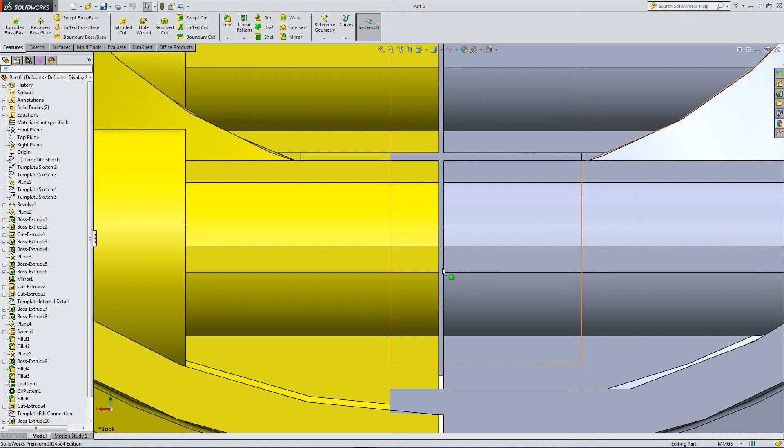Okay, so in this part we're going to start adding some finer detail. We've got the two parts offset, but there's a gap where they don't really meet, and we need to fill it. So I'm going to take the screw mounts and bring them together.

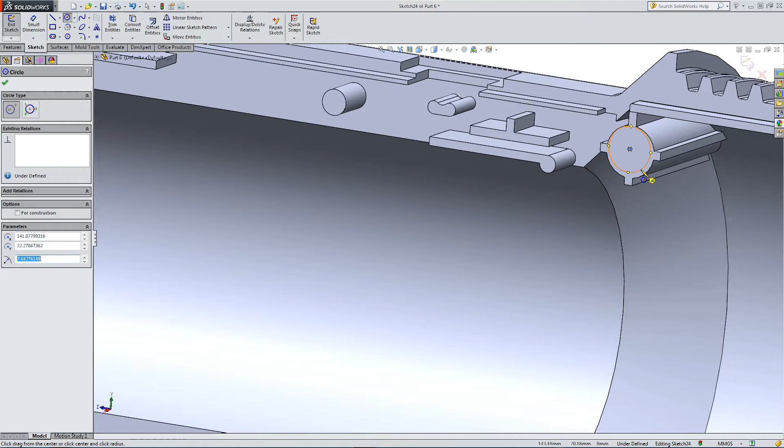So I'm sketching on the right plane, or I'm not - I'm sketching directly on the faces because we're actually offset from the right plane as of when we divided the parts.

So let's put some geometry, in this case circles, over the bits we want to bring out. So we're going to extrude these bits.

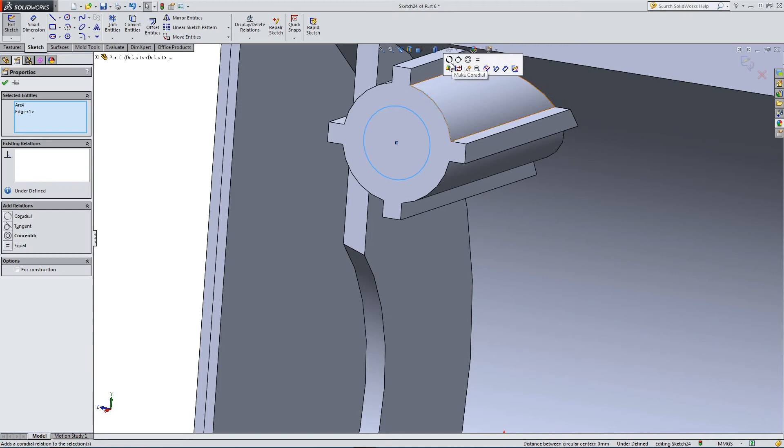We need to make co-radial because we want to fully constrain the circle to some geometry. So to do this, we're just selecting the circle, selecting the edge, making co-radial.

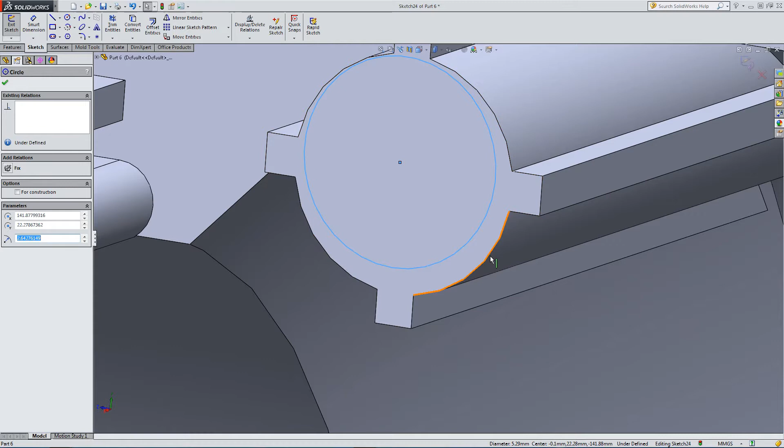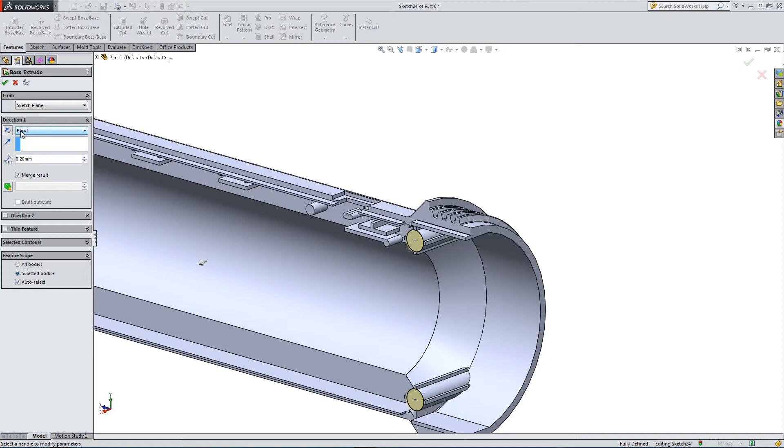So we're in a good position to bring the parts together. I know the width of the rectangle we made to produce the gap was 0.2, so we can make this 0.2. So we're extruding out by 0.2. Feature scope is this part.

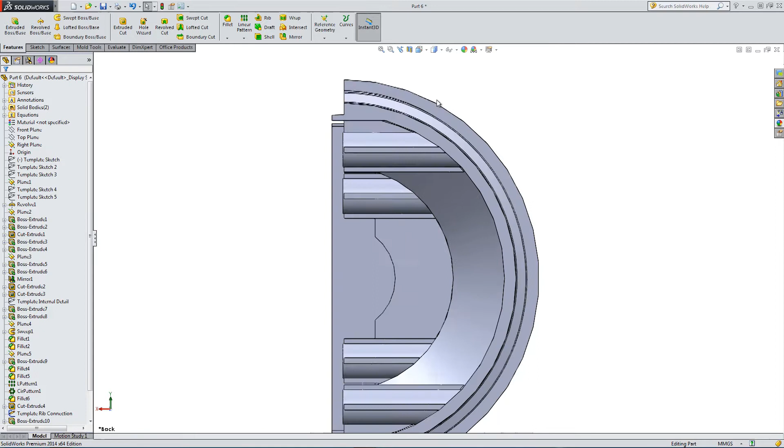That should at least give us 4 fixing points where the two halves clearly meet. Oh, there you go - you can see the gap that we had has gone. So it's just a slightly more realistic part than it was before. Can't really have the parts floating offset from each other.

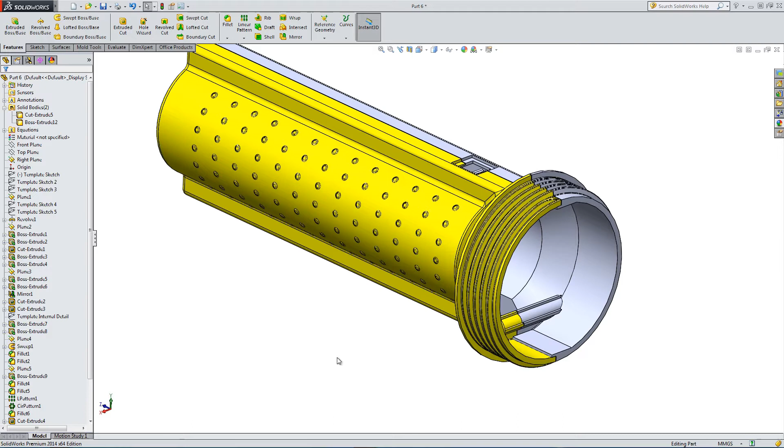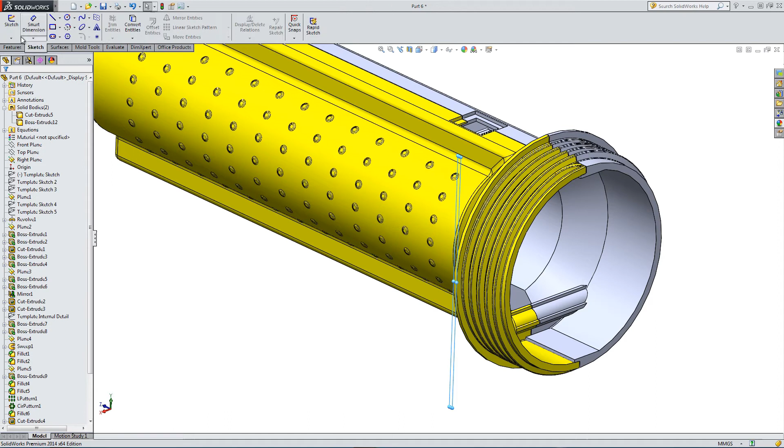So I'm offsetting now from the right plane, but in parallel with the right plane, on the edge of the circle, right on the tip of the lens.

So here we go, I need to draw some circles. I'm offsetting away from the part for a reason, because I'm going to cut some material away from the outside.

So what I'm about to do with these circles, let's link them to the screw mount. So I'm selecting the axis for the screw mounts.

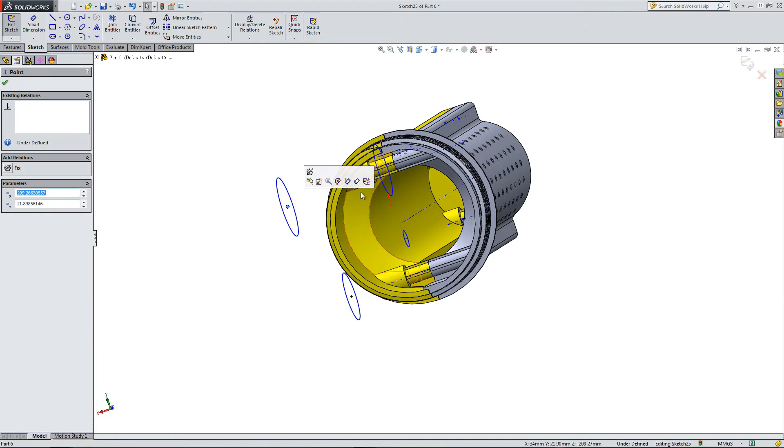Just need to fully constrain all of them. So at the very least, we now have the centers constrained, and we now need to standardize the diameters. So let's make them equal. Let's give them a dimension.

So we're going to make them all 6 mil. So we made all the circles equal, and we made them all 6 mil.

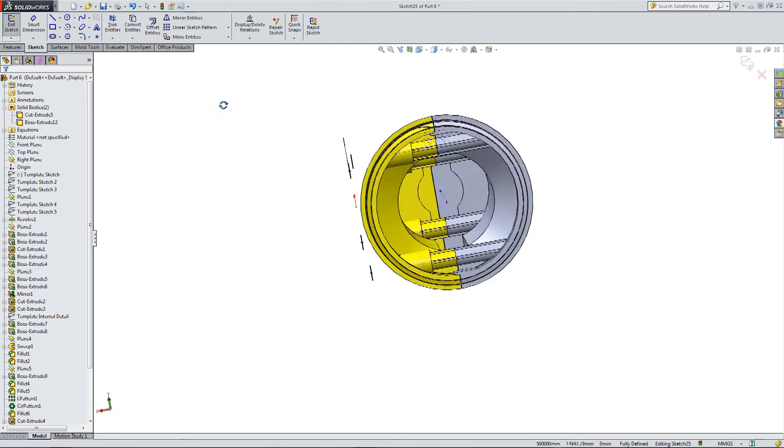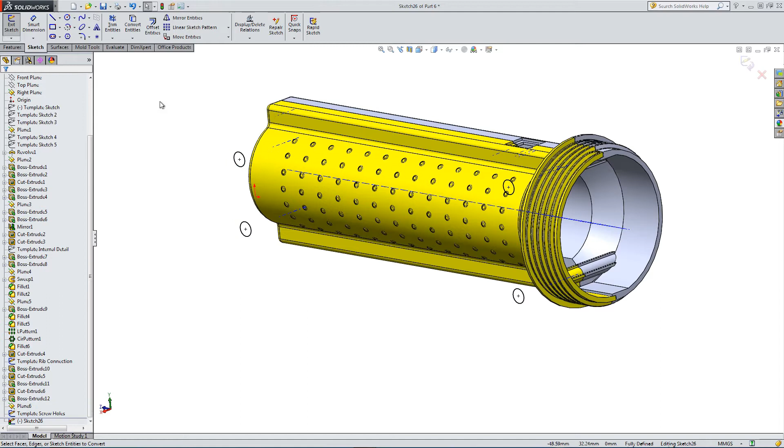So we need to cut these circles. Just have a think about how best to do this. So let's take them one by one. First we take the ones at the front.

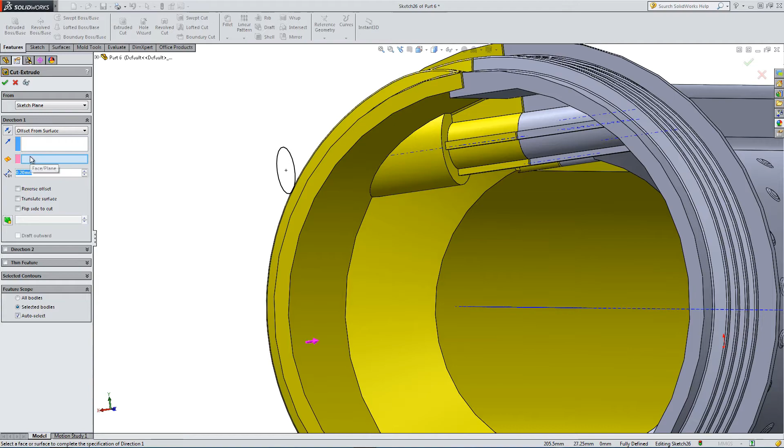So we've selected the same plane, we've copied the geometry from the front, and now we're doing an offset cut extrude, offsetting from surface. We're offset by 2 mil because we need a mounting point. We're just going to hollow out some material for the screw thread. And there you go - we've hollowed out some material and left 2 mil for the connection between the bodies.

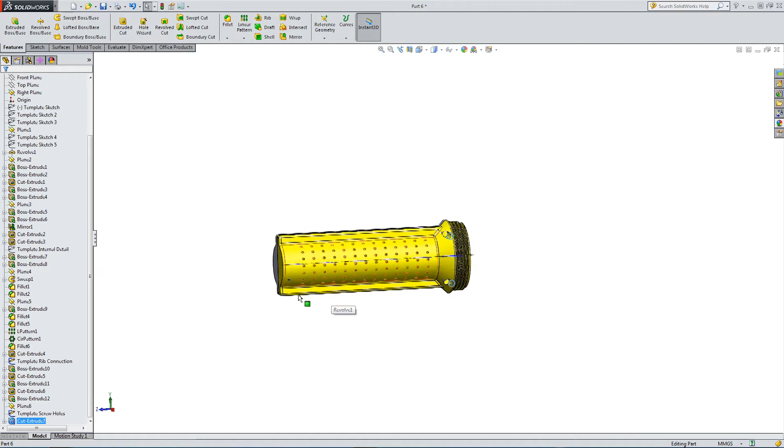Now let's do the back. We can use the template sketch we made, the template screw hole sketch. Sketch on the same plane, up to surface, or offset from surface - we need to pick a surface to offset from.

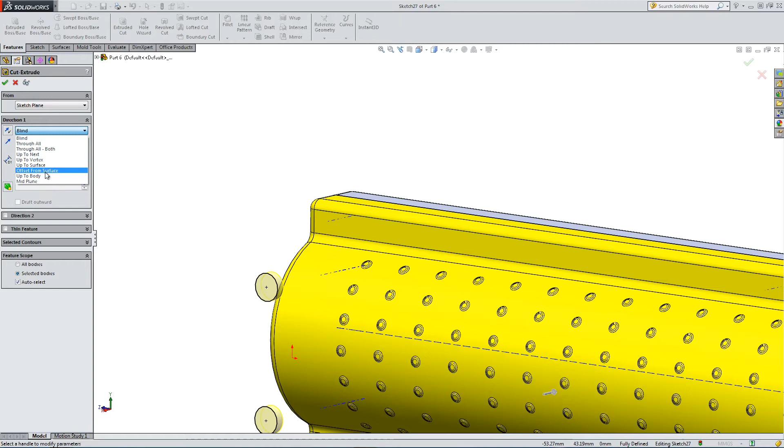We haven't got a lot to play with, so it has to be this back face, yeah? So let's see if there's any depth achieved.

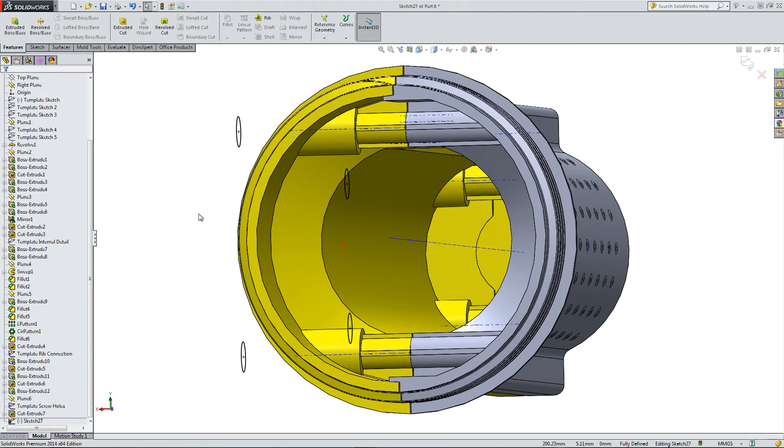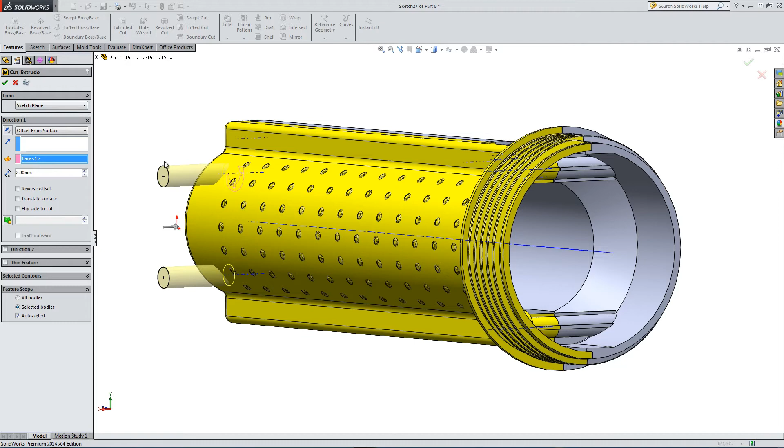Let's try this again. Offset from surface, 2 mil - what do we get? Not a great deal of depth. We may struggle with the screw head sticking out, so might have to look at that.

So now we need some bolt holes. We've selected the hole specification tool. M3 screw clearances, ISO standard type screw clearances. Hole size is an M3.

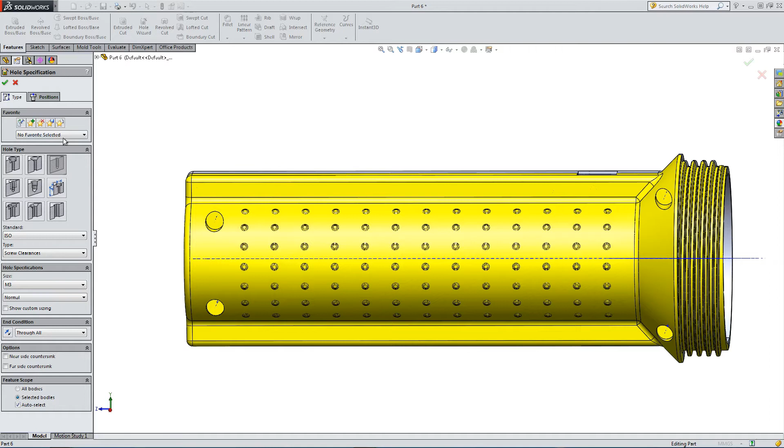We need to find a position, so go into the position tab. Let's place - so there's one. If you place it and manage to get it to relate to the part, that's half the job - you don't have to go back in and realign.

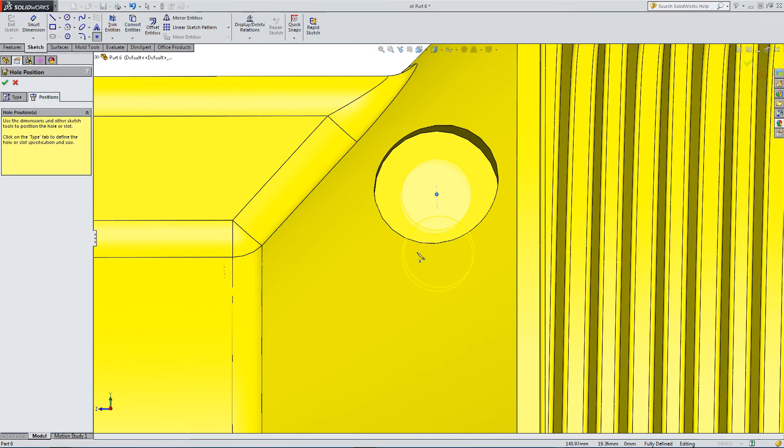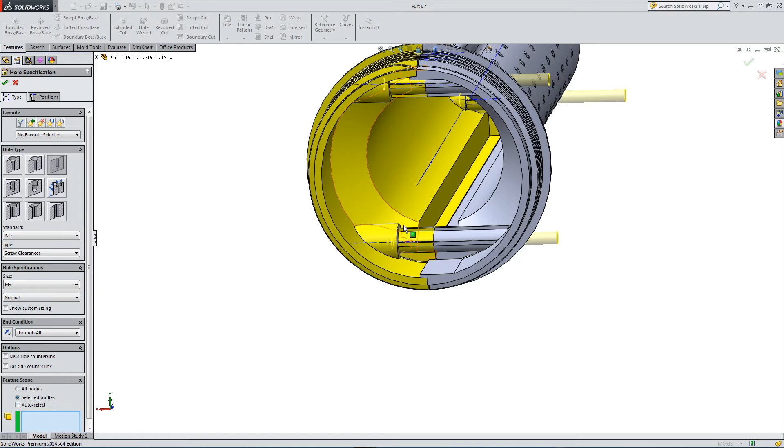Maybe 80, 90% of the way through. So performing the cut, we went through just the yellow body. We've got a threaded mount.

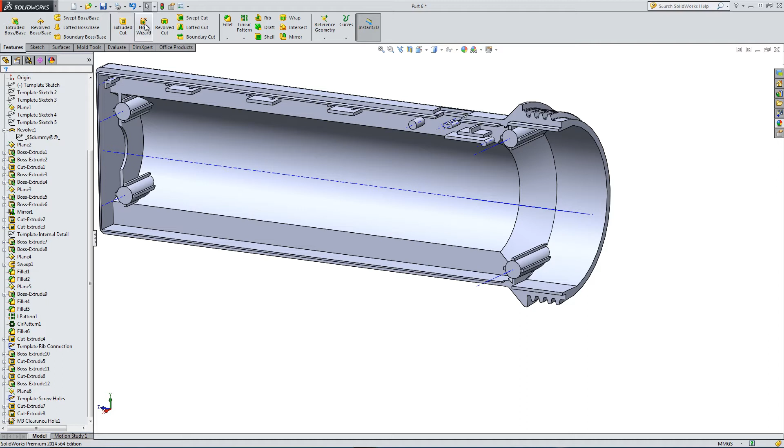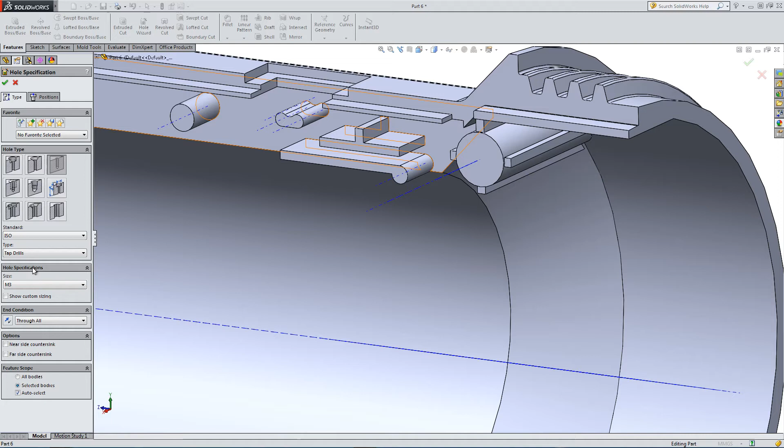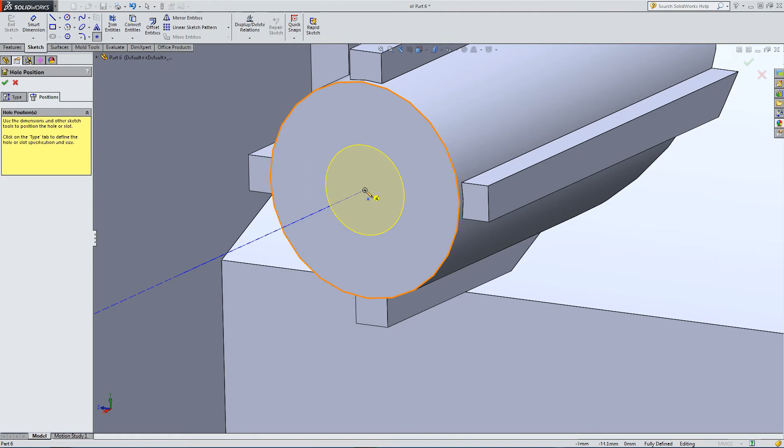So we need to do the same thing to our grey body part. I suppose we could have tried to go through the through hole, but we need a tap drill this time. Going by the ISO standards, but using tap drill - tap drill basically means we're going to leave enough material in this part for somebody to manually use a tap, like a little cutting tool for cutting threads, to cut the threads out. Of course, if you were going to mold this part, you would probably want to build the threads into the part.

So there's no human element getting involved, but so we've got 3 out of 4 parts.

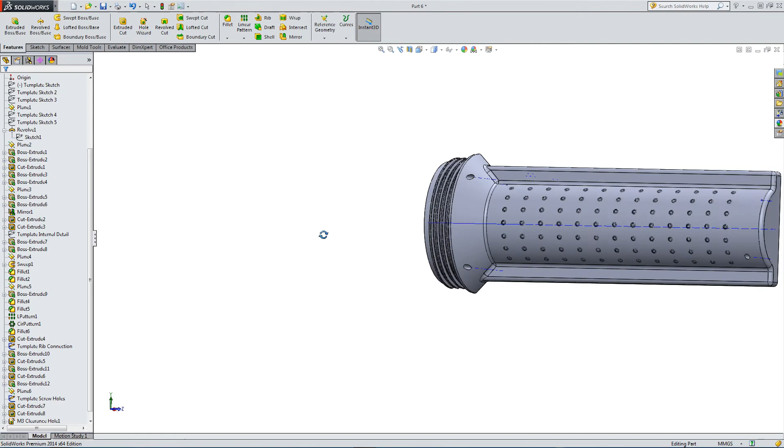So we just need to kind of clean up - auto select, selecting the bodies, blind. Let's see, how far can we go?

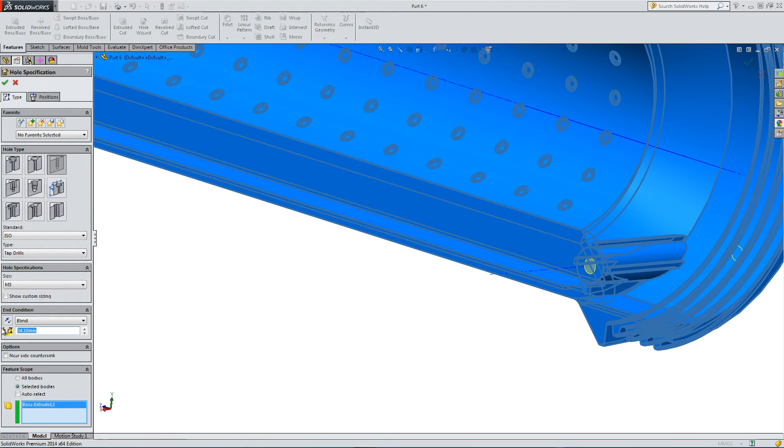20 mil seems a bit excessive, we're going to go all the way through the body, don't want that. 15 gives us some material, we could go back a little bit further. So making it 12 gives us even more material to work with.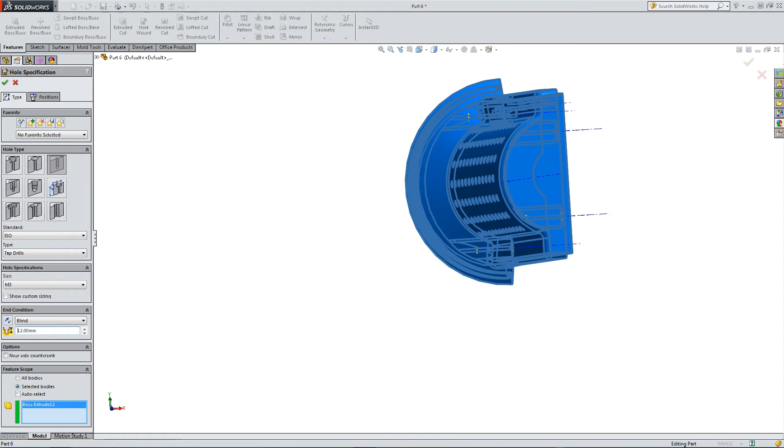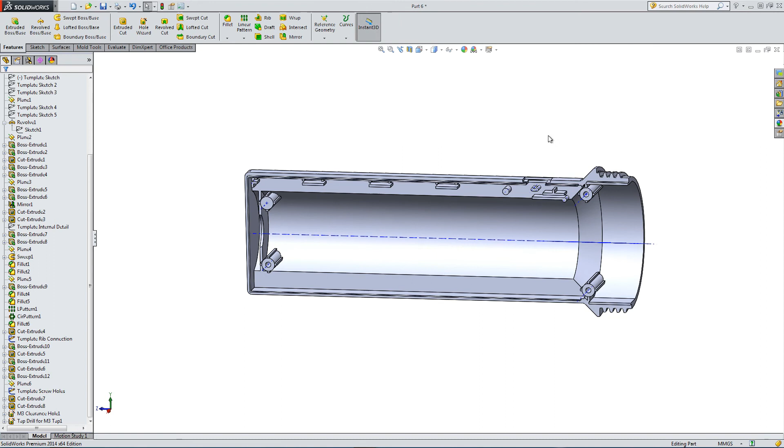So we've got our clearance, and we've got our tap drill. And that is our detail for our holes.

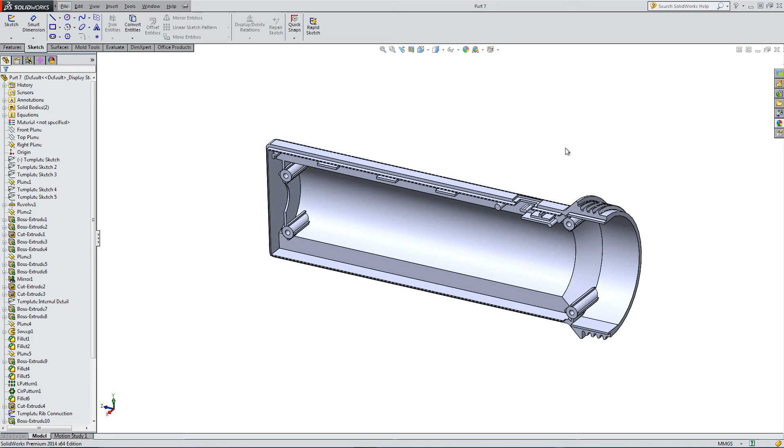Okay, last part, let's add the final detail. We're pretty much finished modelling - we've just got to clean up a few things before we say that the main body section of this is finished, at least.

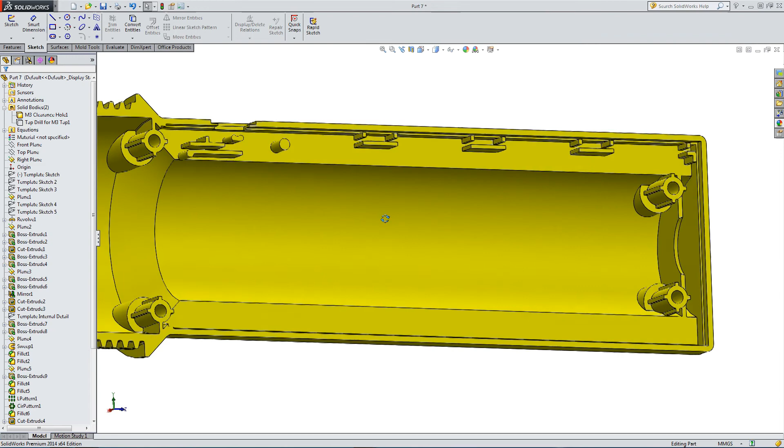So let's rename the 2 solid bodies, just having one last look while we're doing it. So main body part 1, main body part 2, okay.

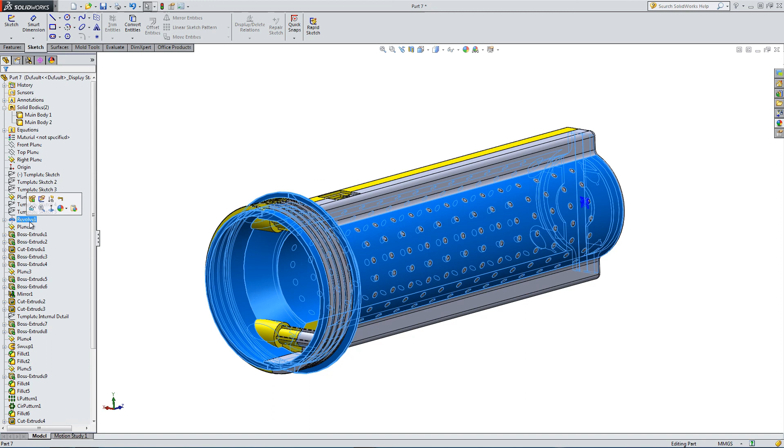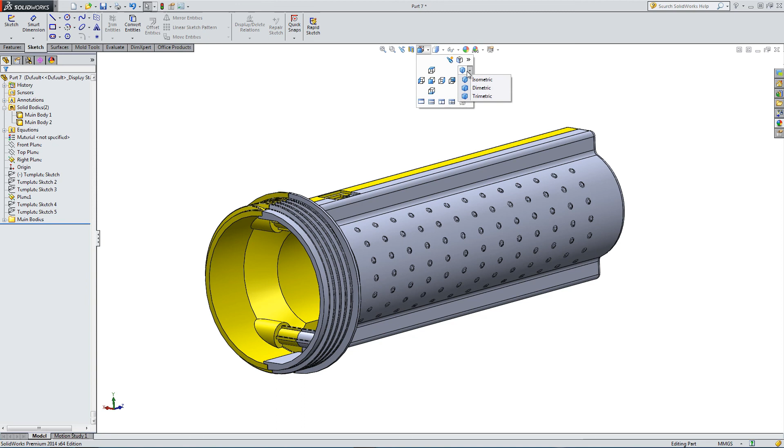Let's add all these parts into a folder. Because we're using a multi-body part style of modelling, we're going to model all our solid bodies in one part file and then export. Let's just bunch everything we've done up for these 2 bodies.